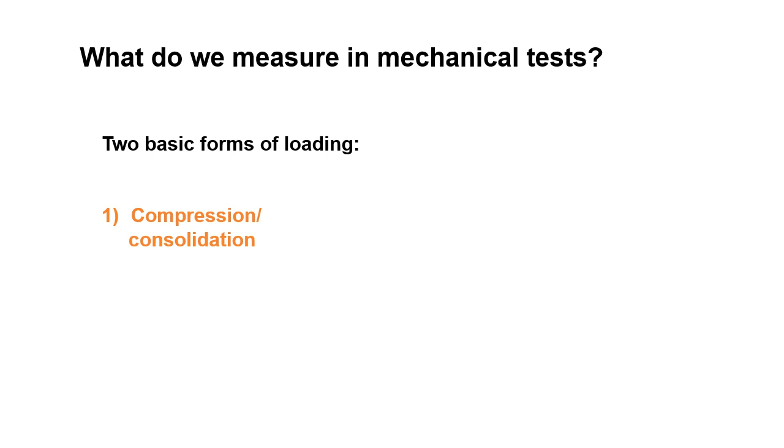So what do we measure in mechanical tests? Well, really, in life, there are two forms of loading. Firstly, compression or consolidation, and we can do that isotropically in the triaxial apparatus, by increasing the cell pressure. That's isotropic loading. Or in the oedometer, what we're applying is one-dimensional or K-naught loading. And the other basic form of loading is shearing.

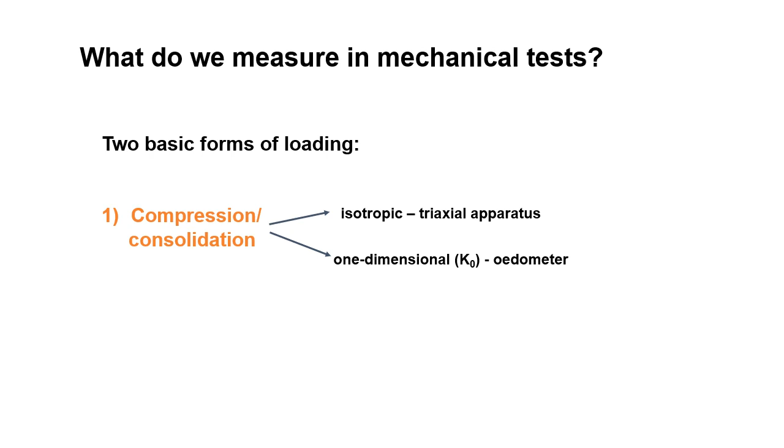In our shearing test, we have some conflicting requirements that are really unique to soil mechanics. No other scientist really has to solve this problem. Firstly, for strength, we need very large strains to reach critical states, and we need the minimum restraint in getting to that large strain, while hopefully the stresses and strains remain uniform. At the other end of the scale, for stiffness, we need to apply and measure tiny stresses and strain changes that, again, nobody else has to worry about. We are unique in soil mechanics.

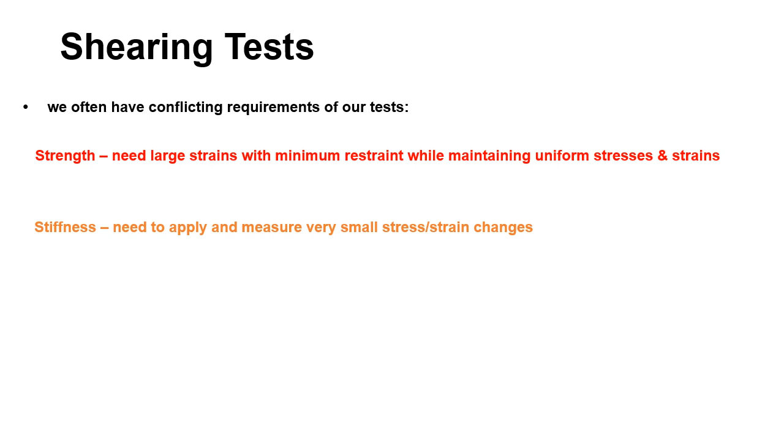The triaxial apparatus is really the only apparatus able to do both of these. Before we get to the triaxial, I'll talk about an apparatus that's more familiar to you because we did it in year one, the direct shear test. So I won't labour this because you're all very familiar with it, I hope.

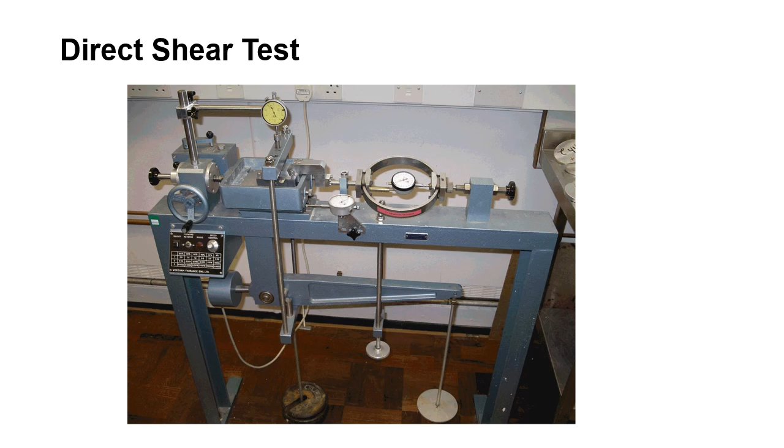That's a schematic diagram of the shear box test, where you've got sort of like a step loading here because of the design, with a normal stress sigma n and a normal shear stress tau. We like to pretend it's doing a perfect sort of shearing like this. Of course it's not, with horizontal and vertical displacements, and h0 is the initial height.

Then we can calculate a shear strain. Remember, it's shear strain in the shear box. A horizontal strain is 0. The horizontal strain would be changing length. Now it's a shear strain, which is delta H divided by the initial height.

And the vertical strain and the volumetric strain are the same. That's because the horizontal strain is 0. And those two, doesn't matter which one it is, epsilon v, v for vertical or v for volumetric, and that's the change of height, delta v, divided by the initial height.

I guess the only real advantage of a shear box is that the mode of shearing is plane strain. That means that, although I can show it on here that it's not changing length, so the horizontal strain is 0 that way, also into the picture, the sample is not changing its width. So it's plane strain. There's no strain into the picture.

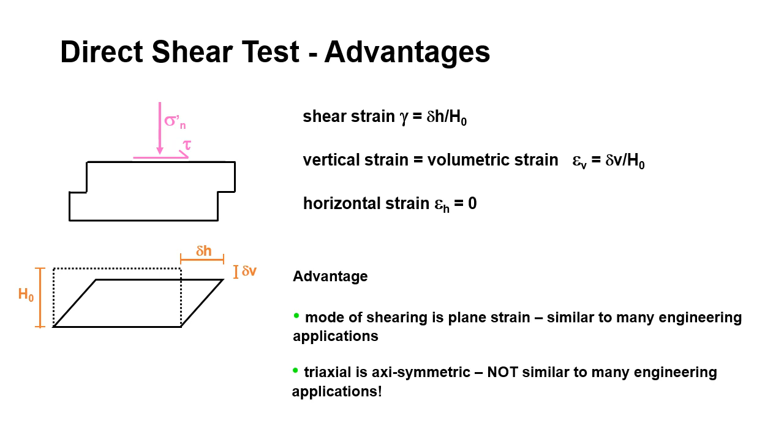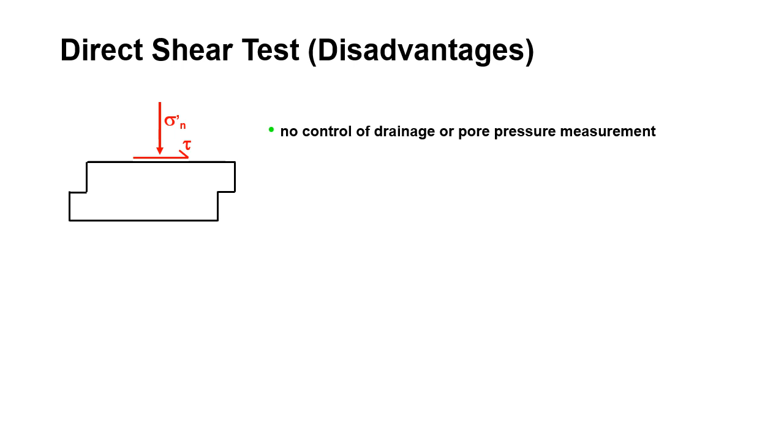Now, there are many disadvantages of our favorite shear box test. Firstly, you can't control the drainage. We did tests on dry samples in year 1, but of course, if you have it saturated, there's no way to switch off a tap and stop the water going in and out. There's no control at all.

Secondly, you may remember from year 1, all of the strains are localized, occurring in the middle of the sample in this sort of lozenge that I've drawn here. And that means that when we calculate gamma and epsilon v, vertical strain or volumetric strain, they're very inaccurate because we're dividing by the whole sample height, whereas actually only this bit's doing something.

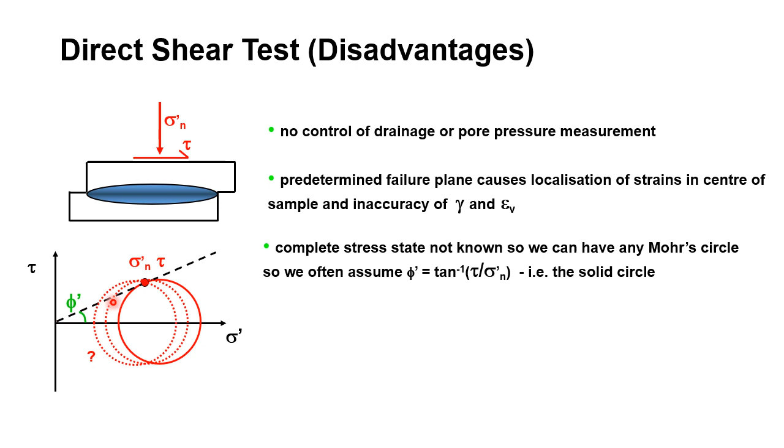And then you may remember that the other big disadvantage is we don't know the stress state. We only know 2 stresses, or one pair of stresses, a normal stress and a shear stress. That's 1 point. Now we can put an infinite number of Mohr circles through 1 point. We assume that the correct solid circle is the red one, giving us that failure envelope phi dash there. There's no reason why that has to be true.

A more sophisticated problem with the shear box is that as you do the shearing, well, you can see that you might start when the shear stress is 0 with that normal stress being a principal stress. But because you're applying a shear stress, the principal stress must be rotating. Now that has an unfortunate effect. It will change the strength of the soil that you measure, especially if it's anisotropic, if it's got different strengths in different directions. So that's a problem.

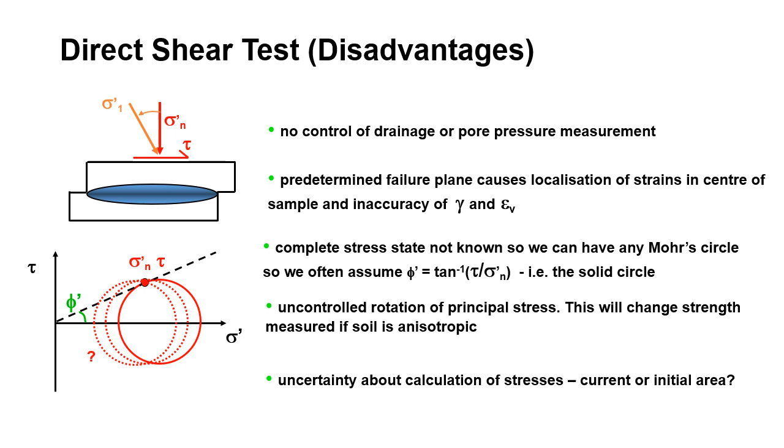And then, of course, you'll remember that there's uncertainty about the calculation of the stresses. Which area do you use? So it does make a difference.

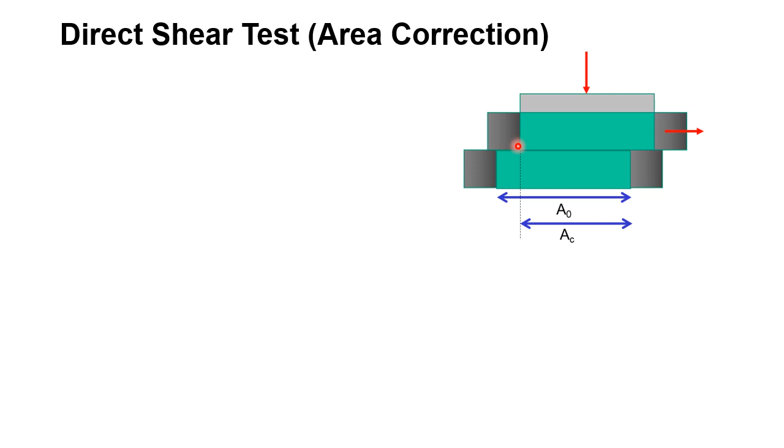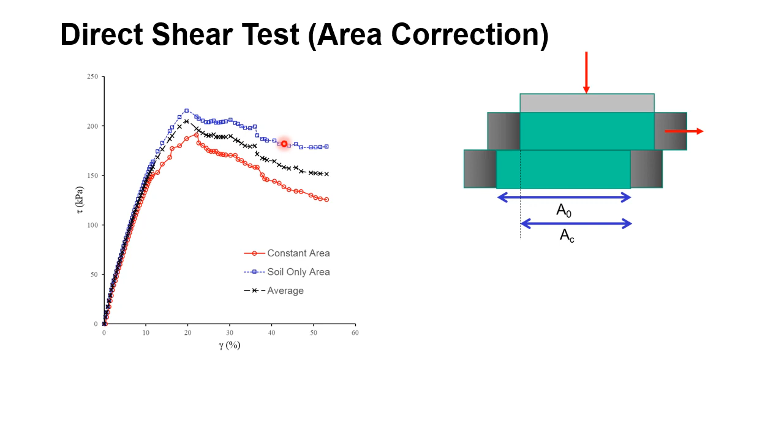This is a schematic of the shear box with that being the initial area, A0. The area of contact with the soil might be this one here, AC, A current. And these are stress strain data from a real test, shear stress versus shear strain: using the constant area, that would be A0, the red one, you get lower strengths. Using the soil only area, that's AC, that gives you higher strength. I don't believe either of them. I tend to use an average. But what you can see is that it makes a huge difference, particularly at the critical state down here. Not so important at the peak.

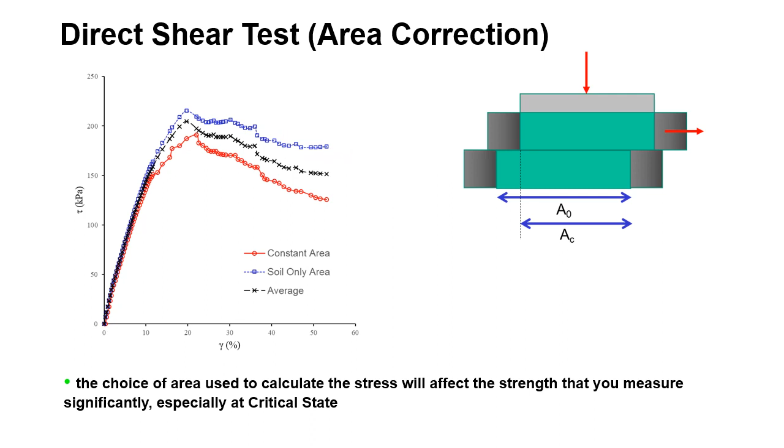The mode of shearing is also very important. We talked about plane strain, that's one mode of shearing. Axisymmetry is another. We can quantify the mode of shearing with what's called B, which is the intermediate principal stress minus the minor principal stress divided by the major principal stress minus the minor.

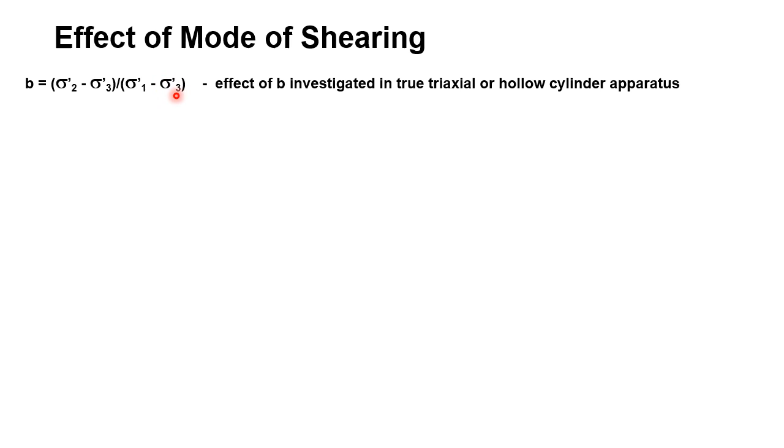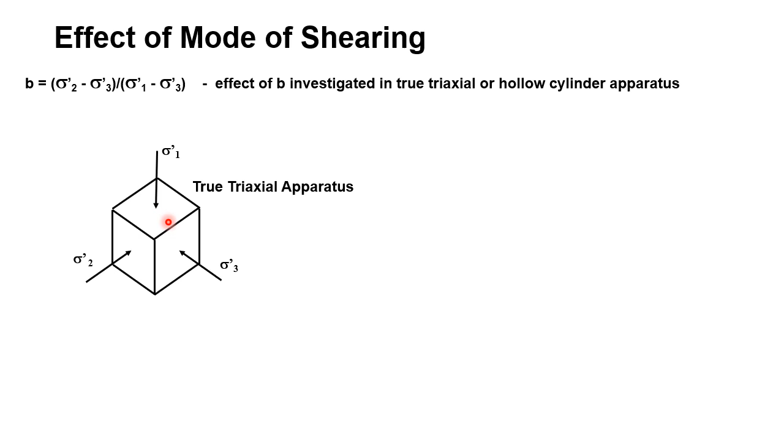Now you really have to investigate this in a hollow cylinder apparatus, which we'll talk about later in the next seminar. You could also use a true triaxial apparatus. Instead of having a cylindrical sample, you have a cubic sample with your major, minor, and intermediate principal stresses.

If you do that, what you get is this: a friction angle plotted against B.

Triaxial compression would be at B as 0. If you think about the definition here, triaxial extension would be at B of 1. Triaxial extension, by the way, is when you decrease sigma 1 while you maintain these two constant. So this stress actually then becomes the minor stress, not the major. That gives you B of 1.

If you look at typical data, like this one here for a typical sand, the friction angle goes up to plane strain and then reduces a bit. So this is what you measure in a triaxial, but a shear box test, plane strain, would give you a higher value.

And that's good, really. Having a higher phi dash in plane strain is good, because although we can get a phi dash that's very accurate in the triaxial, unlike the shear box, it will be conservative. In fact, in design, what you probably should do is take your triaxial compression value and add a few degrees. Better that than relying on a shear box, which is just rubbish.

And of course, as I said before, almost all engineering design is plane strain here, not triaxial compression, which is what we do.

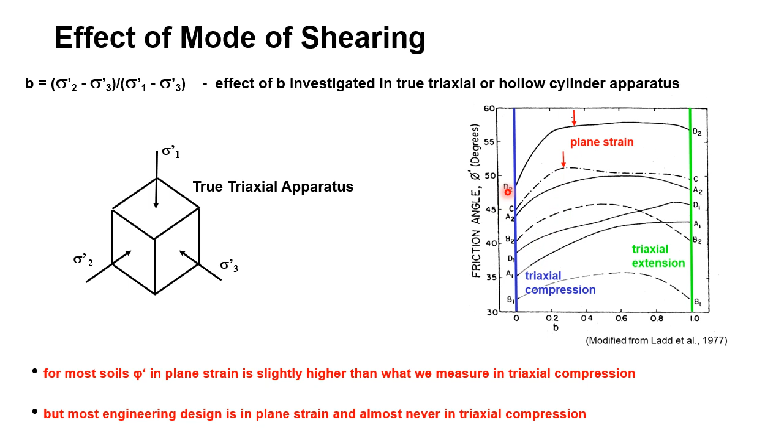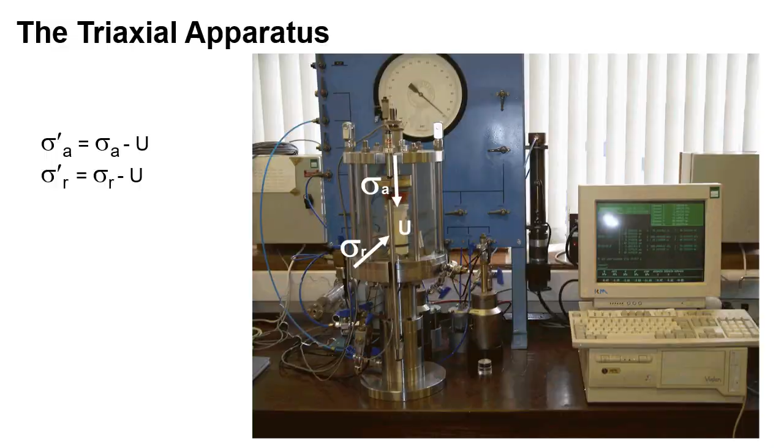So here's a schematic diagram of a triaxial sample with axial stress, and the two radial stresses, of course, the same. The advantages of a triaxial is that we can control the drainage. We can switch off a tap to make it undrained, not like a shear box.

You know the complete stress state. We can calculate sigma R dash and sigma A dash from the pore pressures and total stresses. And therefore, we know where is the Mohr circle, and we know where is this friction angle.

Disadvantage, as I've said a couple of times, is that it's axisymmetric, and soil parameters depend on the mode of loading. It's not the right one. We would prefer plane strain.

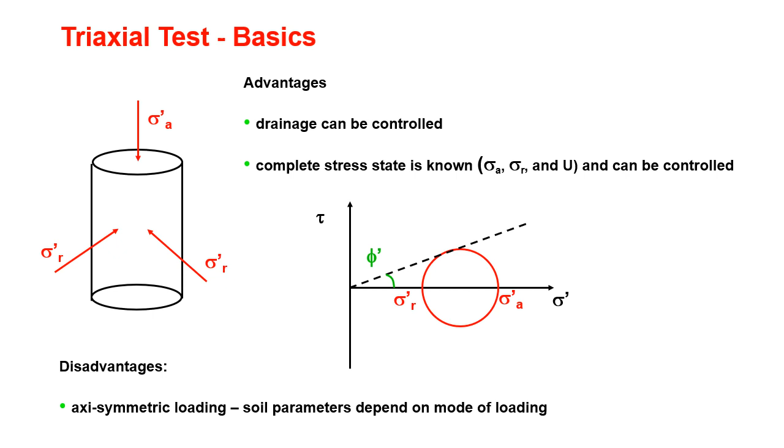This is really revision from year one, so we'll speed through this very, very quickly. Remember that your shear stresses don't mind whether they're effective or total, they're the same thing. Effective stresses are total minus pore pressure.

Remember that on your triaxial, there is no shear stress on this boundary. Why? Because you're applying the pressure with water, and water doesn't transmit shear stress. So if there's no shear stress on that boundary, there's no shear stress on that boundary. So sigma A and sigma R are principal stresses. This should all be revision.

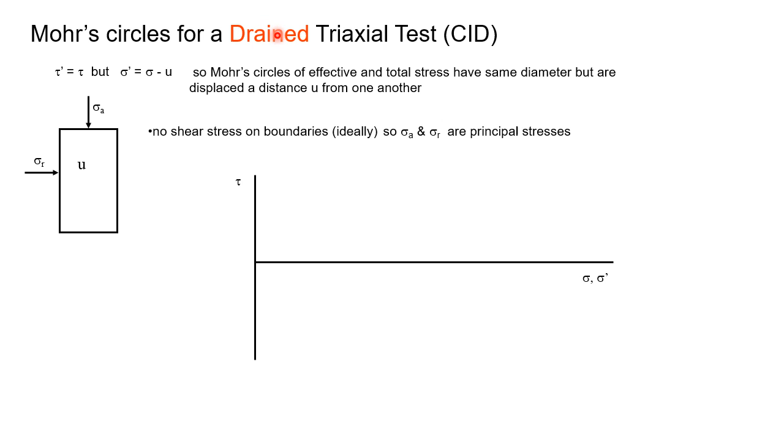For drained tests, we're talking about drained tests here, your Mohr circles will look like this: total stresses in red, effective stresses in blue. They're exactly the same Mohr circles, they're just offset by the pore pressure.

It doesn't matter where I measure the pore pressure, I could go from there to there. Any two similar points will give me the same value because the Mohr circles are identical, they're just offset. So that point and that point will have the same pore pressure.

It's constant. It's the final Mohr circle at failure in effective stresses that defines failure. The total stresses are of no interest.

And then if you remember your pole, well, your pole of your Mohr circle is there at sigma r dash. So the plane of failure will be that one, which translates to the same angle in reality in the sample. And that will be the plane on which you might get a well-defined failure plane forming. There's another plane of failure going to the failure envelope on this side, which is that one.

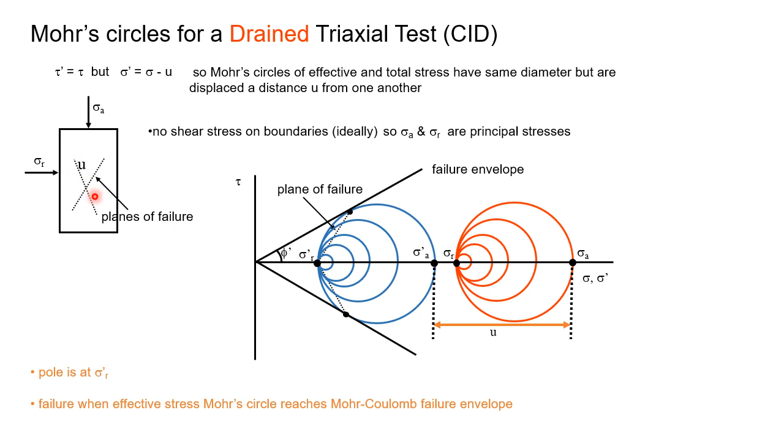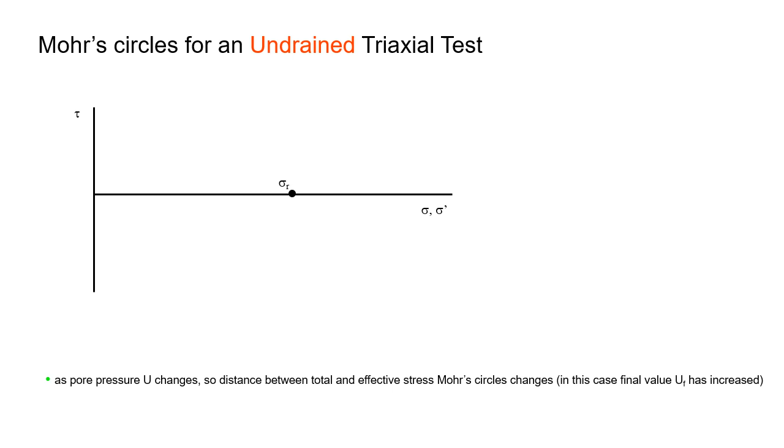Now for undrained testing, again, hopefully it's revision so we can go through it quite quickly. The total stresses just look the same. The Mohr circle gets bigger as sigma A increases.

The effective stresses, remember, they start off as a point. Initially, the axial and radial stresses are the same, and the Mohr circles increase in size. But here there's a catch: the pore pressure is changing. So the final pore pressure, UF, is different to U0. So the Mohr circles of effective stress are migrating.

In this case, they're migrating towards the left. So sigma r dash is moving towards the left, and that's because the pore pressure has increased. You could have the other case where the pore pressures decrease and the Mohr circles would go off this way, getting bigger but going towards the right. The total stresses will always stay in the same place.

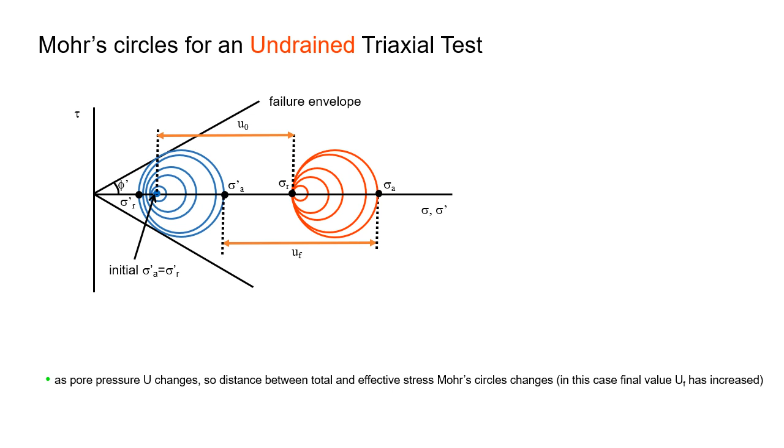Of course, if you want to represent the whole test, a Mohr circle is a bit useless because there are an infinite number of Mohr circles between the start of the test and the end of the test. So we do that with stress paths.

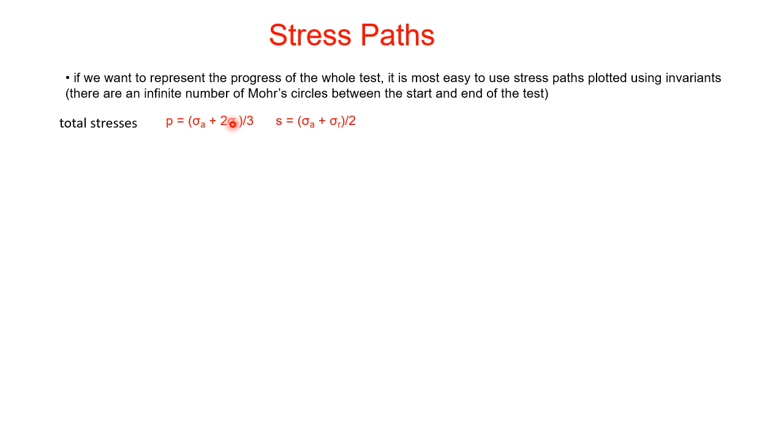I hope you remember the definitions of P, which is the average stress, the mean normal total stress. Total, no dashes: axial stress, 2 times the radial because there are 2 horizontal directions, all divided by 3. Engineers in industry love S, which is just axial plus radial over 2. They like that because that's the middle of the Mohr circle.

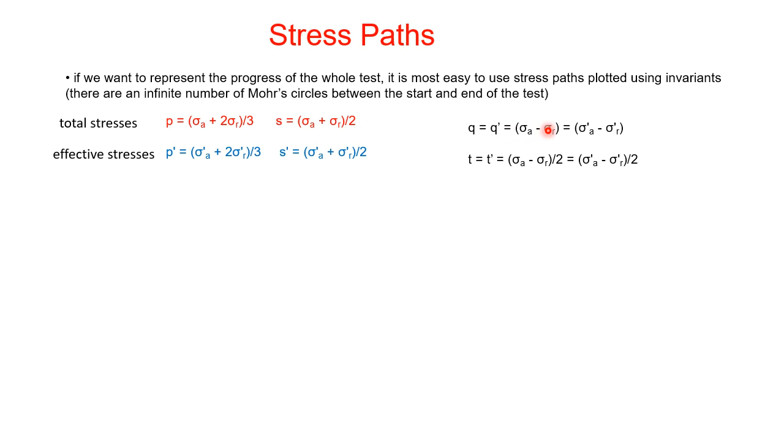Effective stresses, they're just dashes in here. So effective stresses, effective axial, effective radial, give you P dash, and same with S dash. In terms of Q, Q and Q dash are of course the same, and that's simply the deviator stress. The axial minus the radial stress doesn't matter whether it's total or effective, it's the same. And the same is true of T or T dash. It's half of Q, the radius of the Mohr circle, whereas Q is the diameter of the Mohr circle.

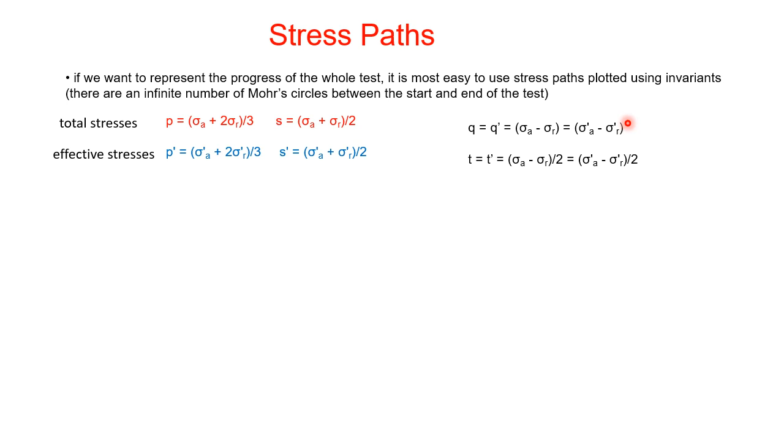So, for a standard drained triaxial test, engineers love this because if they plot T against S or S dash, the total stress paths and the effective stress paths are parallel. They have a gradient of 1 and they're just offset by the pore pressure. It's drained, so the pore pressure is constant, so they remain parallel.

It's more complicated in Q and P. The total and effective stress paths are again parallel, separated by the pore pressure U, which remains the same, but the gradient is 3. You have to look at these equations for P and Q to understand why the gradient is 3. Remember, sigma A is increasing, whereas sigma R is constant, so you can see that's where the gradient of 3 comes from.

So, T and S are loved by practicing engineers. They're easy, they represent the top of the Mohr circle, the gradient is 1, but they're not right. They're not invariants because in T and S you're forgetting one of the stresses, one of the horizontal or radial stresses has gone. They are not correct.

Of course, if you did a well-designed test, you can see here with a normal triaxial test there's a problem. As you do the test, you're increasing the deviator stress, which is essentially increasing the shear stresses. But also you're increasing P dash, the normal stresses, which is a bit of a rubbish test to do. Any good physicist wouldn't do that.

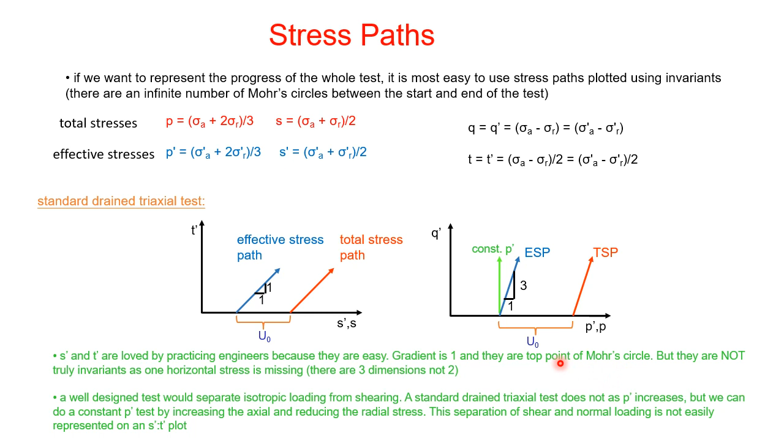He or she would have a test where you increased only the shear stresses and you'd follow a vertical path, and P dash would be constant. Now you can do that in a triaxial apparatus. If you look at the equation here, all you would have to do is increase the axial stress while you decrease the radial stress at half the rate. You can do it - nobody does it, which is a great shame. It's a more fundamental type of thing to do, separating the shear stresses and the normal stresses.

You'll remember from year one that drained stress paths may go directly to a critical state on loose samples or at high stresses, and at dense samples or lower stresses you may go up to a peak and then back to the critical state.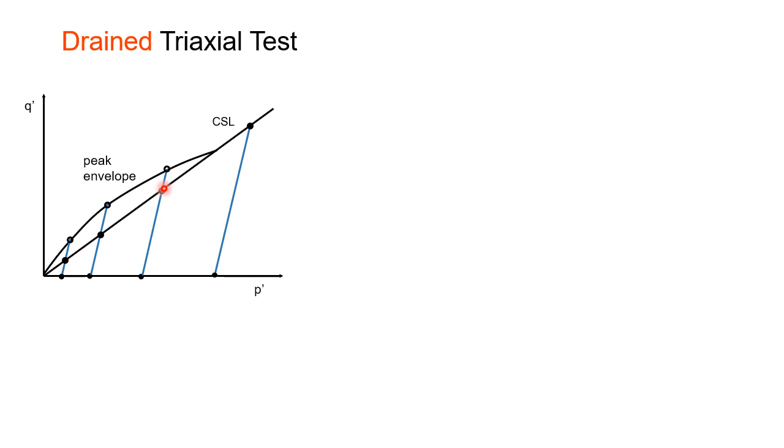Of course, the usual test is this one here, at a gradient of 3 with the total radial stress constant and pore pressure constant - that's the gradient of 3. But as I said, with a computer-controlled apparatus, you can do anything. A particularly useful one is that constant P' test, which is pure shearing, no change of the mean normal stress. But you can do anything you want.

You can take these stress paths in any direction you want. In red, total stresses, in blue, effective stresses. And the offset is simply the pore pressure, and the offset, the pore pressure, is constant for each pair.

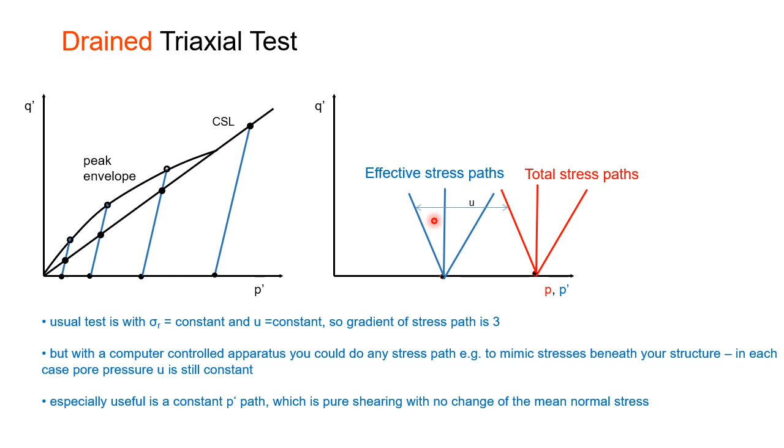Unfortunately, we don't typically take advantage of the capability of the apparatus to do that type of thing. We could, for example, mimic the stress changes that we're expecting beneath our structure, but we tend not to do it.

In undrained loading, remember that the soil is going to decide whether the stress path goes left or right. Over consolidated soils go that way, normally consolidated soils go that way. It's the soil that's deciding, not you.

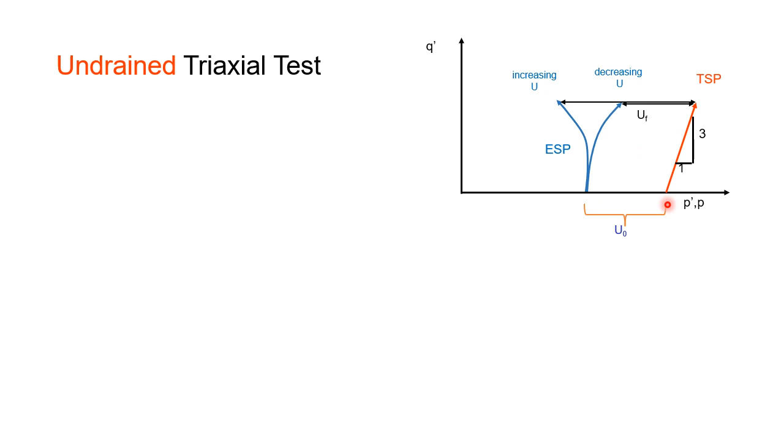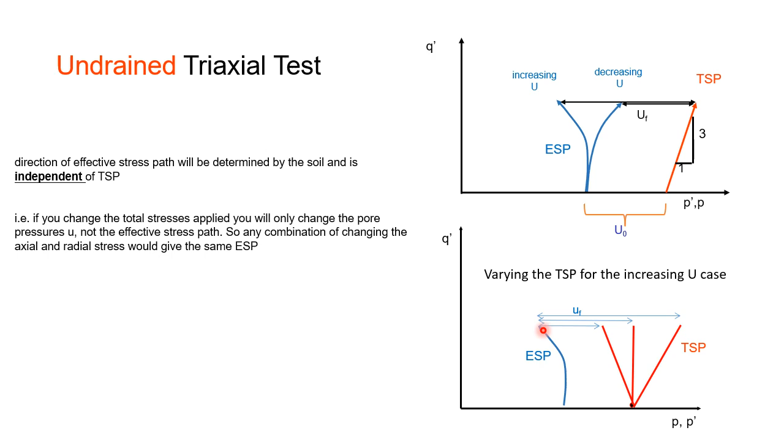So if you change the total stress path direction, let's say for this example with a normally consolidated clay with a stress path going left. If you change the total stress path by applying different stresses in your triaxial and it's undrained, it won't make any difference. The effective stress path will just be the same. All that will happen is you'll measure different pore pressures because you've chosen a different total stress path. The soil determines the effective stress path, not you.

So here's the design of the triaxial apparatus. Firstly, remember that the radial stress is applied by water pressure in this chamber. That means the sample has to be contained within a latex membrane to stop that water pressure going into the sample. You can see the latex membrane here. That means the sample will drain if it changes volume through this tube here, this drainage line, and we can simply switch off a tap there, and then we can control if it is drained or undrained.

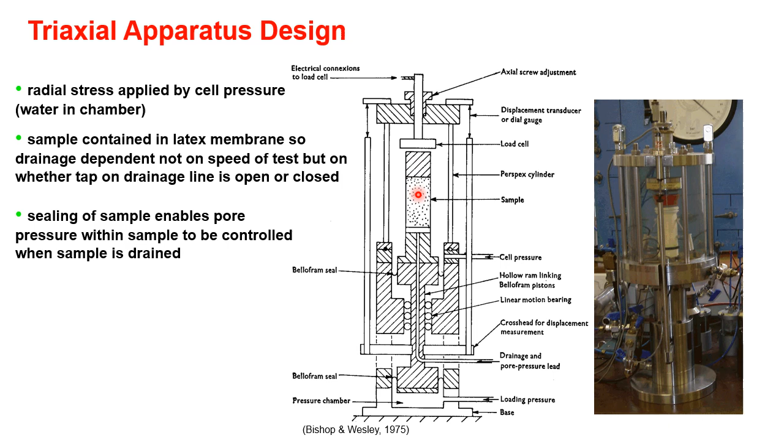Because the sample's sealed, if we leave that tap open and it's drained, we can also change the pressure inside the sample. It's our choice what it is.

This apparatus is a more sophisticated one, not typical of industry, but more typical in universities, which is a hydraulic one, and it's got a piston running up through here. The piston loads the sample from underneath, pushing it against a load cell, and you push the piston up with pressure in a chamber here. It's hydraulic.

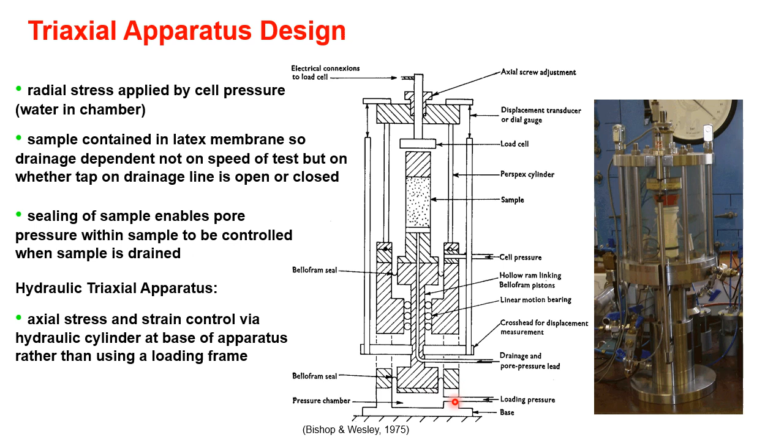More typical is the type of thing that we would have talked about in year one, which is using a loading frame. And typically, one you might see in industry, the loading frame pushes a ram down to the top of the cell, pushing the sample from above. That's rather less sophisticated, but unfortunately, that's what industry tends to use.

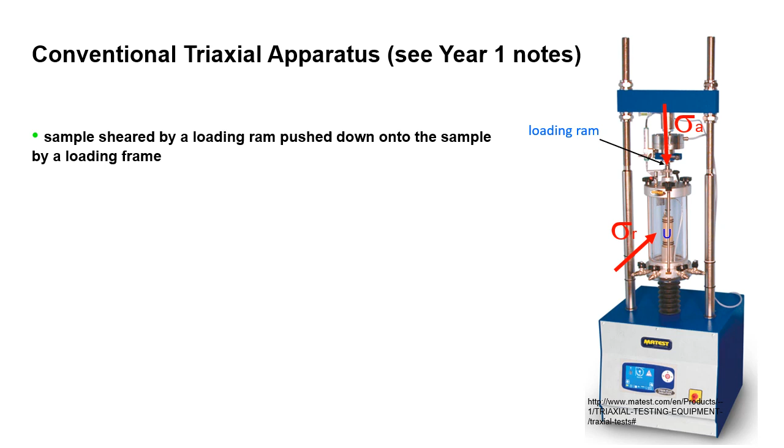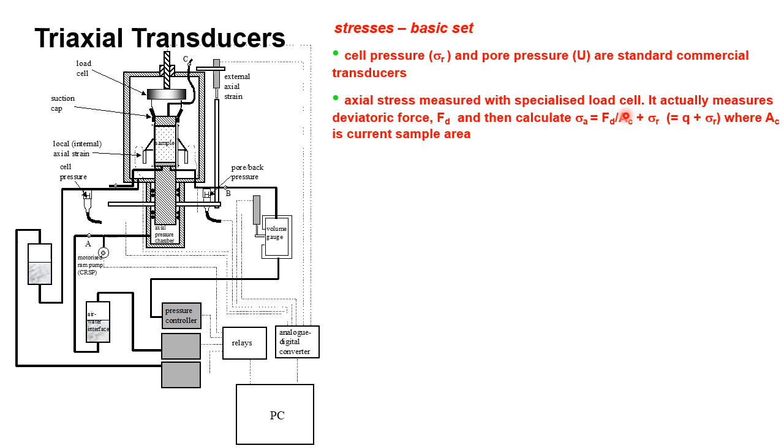Or for the axial stress, you have to take the deviatoric stress plus the radial stress, the cell pressure. And the area you have to use in the calculation of the deviator stress is the current area of the sample, because the sample will be changing dimensions during the test.

For the strains, for the axial strain, we have an LVDT here, which is measuring the axial displacement. As this piston moves up, it's moving this system up, pushing this displacement transducer up. Of course, we divide by the initial height of the sample to get the axial strain.

The volume change of the sample is measured by measuring the water coming out of the sample and going into a volume gauge here, which measures the water coming out, or indeed going into the sample. Of course, you have to divide the volume change in cc's by the initial volume of the sample to get the volumetric strain, epsilon v.

Typical apparatus have no measurement of the radial strain. Now that would be good, but it's not typical. So what we have to do to calculate shear strain, which would normally be 2/3 axial minus radial strain, we don't measure that. So we have to take axial strain minus volumetric strain over 3. You work out the mathematics, it's the same thing.

And also, because there is no radial strain, which would give us the current area very nicely, we have to calculate the current area for this calculation from the axial and volumetric strains, which we'll see in a minute. There are more advanced transducers, which we'll talk about in the next bit of lecture.

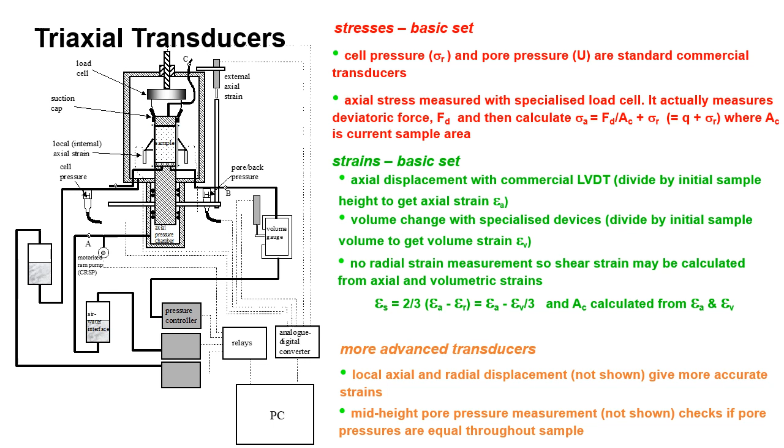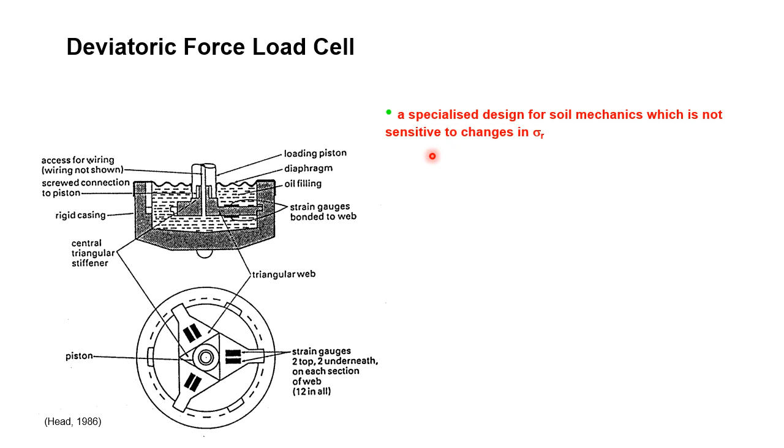This is the load cell that measures the deviatoric force, the change in force from the initial isotropic state. There's very specialized transducers coming from just soil mechanics, so they're expensive and unreliable. It's a load cell which is full of oil pressure, and I won't go into the design, but it makes them insensitive to changes in pressure. So if the cell pressure changes, the load cell reading doesn't change. It only changes when it presses down on the sample.

I mentioned area corrections. Those are very important in soil mechanics and triaxial tests. So this is deviator stress against axial strain. This is data for London clay. And you can see the green line is the sort of raw data with no area correction, or just assuming that the area is constant.

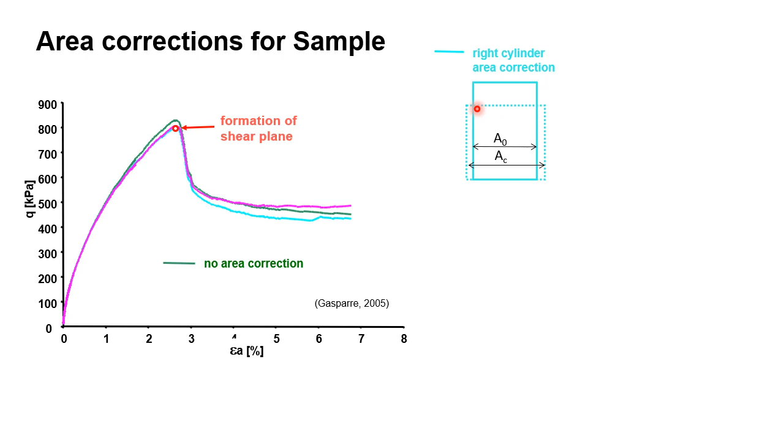The traditional area correction is what's called a right cylinder. You assume that the sample area just remains a cylinder, but a short fat cylinder instead of a tall thin cylinder. And you can calculate the new area like this: A naught, the initial area, times 1 minus epsilon v, volumetric strain, divided by 1 minus epsilon a, axial strain.

Of course, many samples, particularly one like this, which strain softens rapidly, tend to develop a shear plane. Then I have to tell you that the calculation of the area to use to calculate these stresses gets more complicated, and I won't give you the equation. It's really too complicated for you. It's nasty.

But then, of course, some samples will fail in a very complicated way like this, and then you can do nothing about it. There's no formula for that one. And the difference is significant, particularly at the larger strains down here at the critical state, which is what we saw in a shear box.

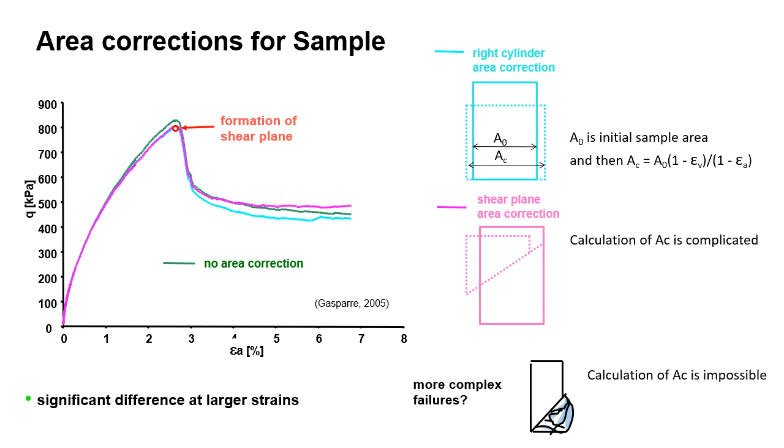We can measure the volume change on the sample by using a volume gauge device. This is the Imperial College type. The water comes out of the sample through a drainage line, pushes into a chamber, pushing a piston down, and that's registered on this displacement transducer. We can use the same device to apply pressure to the pore pressure by putting some pressure under here, transmitted through the piston and into the sample.

The other way to get the volumetric strain is to measure the radial strain, but it's rarely done, in which case you would have the axial strain plus 2 times the radial strain as the volumetric strain.

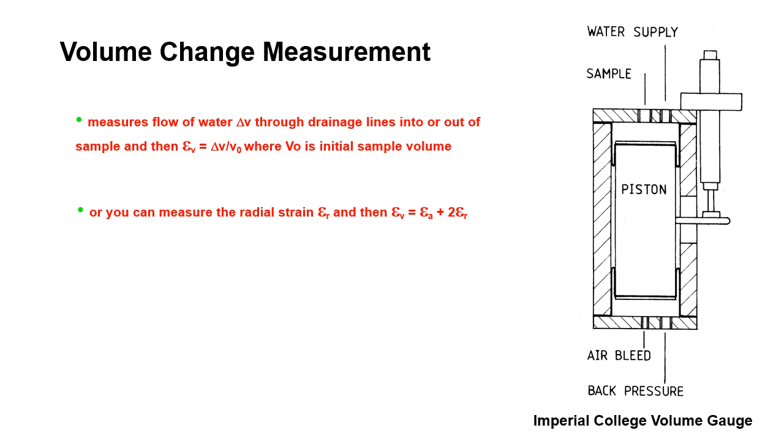Measuring stresses and strains is common these days. Nobody does it manually anymore, even in industry. But what is less common is using control of tests by computer. Remember, I said the computer is a very cheap old thing, one that's come out of a rubbish skip. What is sophisticated are the control algorithms. They're very sophisticated, but we don't need fast computers because the tests are very slow. The test speed is controlled by the soil response, which is slow.

So here we have our triaxial. The transducers send voltage out to the data logger. That sends a signal out to the computer. And that converts it into kilopascals. So this will be sending millivolts or something to the computer. The computer converts millivolts into kilopascals or millimeters and strains and stresses and things. That then decides how the test is running and what changes need to be made. It will send a command to a controller, and the controller will change things in the triaxial.

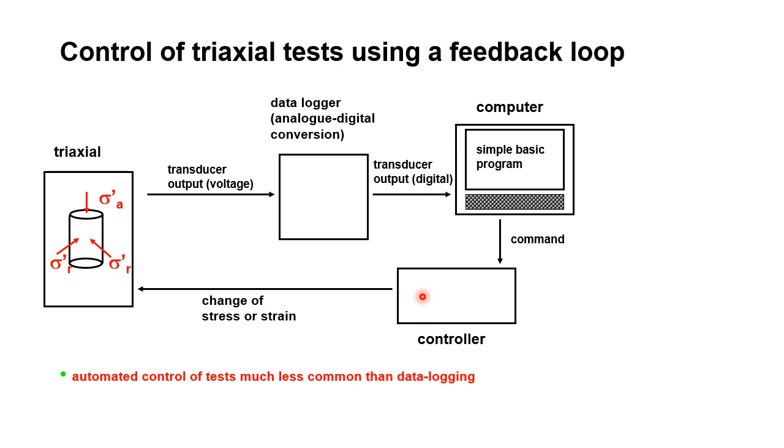So you know about the transducers, and I'm sure you've seen data loggers. The whole thing is called a feedback loop. What you don't know about are the controllers. So let's have a quick look at those. A very simple system like the Imperial College system is air-driven. So you need compressors to supply the air.

There are 3 air pressure controllers, one each for the axial stress, the radial stress, and the pore pressure. You need air-water interfaces because the chamber has water pressure in here, water pressure in here, and water pressure inside the sample. So you need air-water interfaces.

Now, I already said that for the volume gauge, that provides an air-water interface. So air is going in the bottom, water pressure is coming out of the top and going into the sample. But the other two, you need an air-water interface as well. So air pressure is coming in here, water pressure is coming out and going into the base of the sample. Likewise for the cell pressure.

If we were to do a test where we just increased the axial pressure in this chamber and the soil were strain softening like the London clay we just saw, when we reached the peak, it would suddenly fail and the whole thing would move up suddenly as the sample collapsed. So we don't do that.

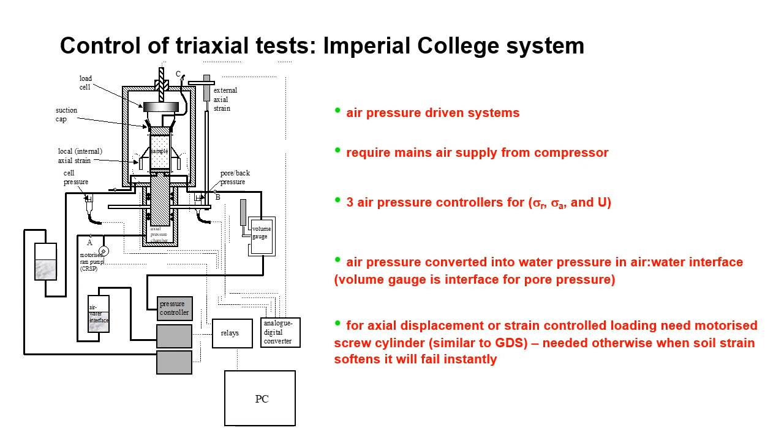What we do is we push water into this chamber at a controlled rate in terms of cc's per hour, and we do that with this device. It's a screw cylinder, a motorized screw cylinder, similar to the one commercially made by a company called GDS, which is this one. You have a motor and a gearbox driving a ball screw with a piston pushing water into the apparatus. Now that's happening at a controlled rate of cc's per hour, not a controlled pressure.

Now the GDS system is a very clever one. It can be used to control rates of displacement, but it also can be used to control the pressure. The computer can move the motor up and down to give you a particular pressure in this cylinder.

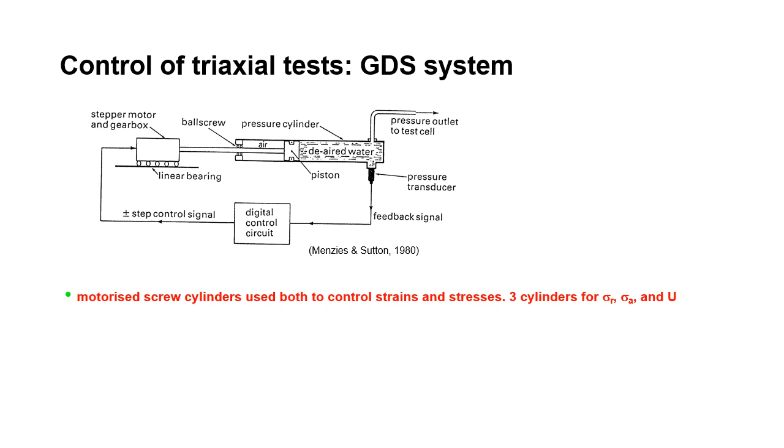Finally, for this part of the lecture, I'll talk about philosophy of testing. There is an awful lot that can go wrong with conducting and interpreting tests. We must never conduct and interpret tests unless we have a chosen and appropriate theoretical framework. We must know that theoretical framework, the one we want to use, before we do the test.

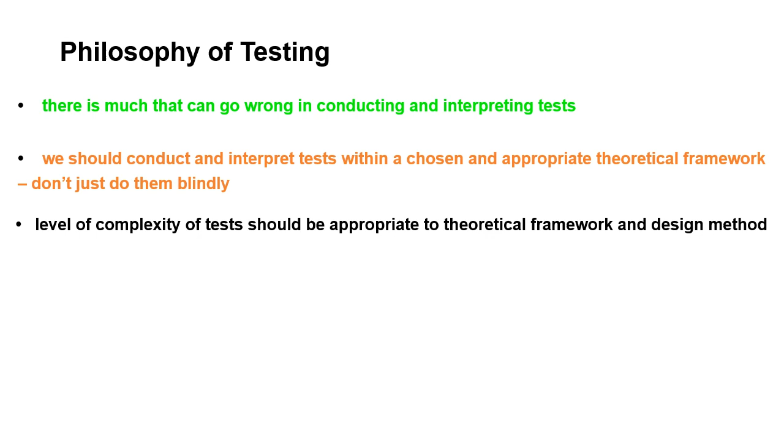That's a problem because, of course, these days people do the lab testing long before they've decided what exactly they're designing, which is a major problem. The level of complexity of the tests must be appropriate to the theoretical framework and the design method, i.e., what we're designing. There's no point in throwing money away on really complicated tests for something that's very simple and not an important structure.

You should never use a shopping list of tests. There's a temptation for young engineers to simply see what was done on the last project and have the same tests. Why not? Well, no, that's not right. You have to decide what quality of data you really need and what you need it for.

Although I said you should be careful about doing appropriate tests to your design, the level of complexity should be appropriate. Large numbers of poor tests can be very detrimental when choosing a design value, and I'm going to show you a shocking example, which is from my own work.

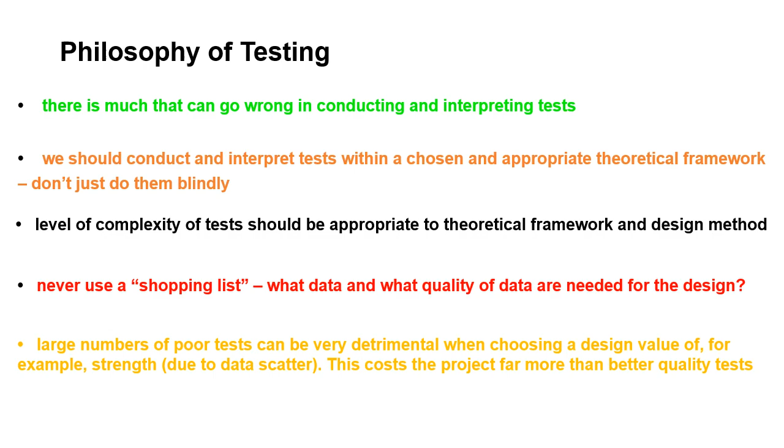So this was my first project. I was barely 21 years old, so that's my only defense for such terrible design. I was designing these piles in a North Sea gas platform. These piles are waiting to be driven through the legs of the structures here. Anyway, this is a design profile for undrained shear strength in the clay.

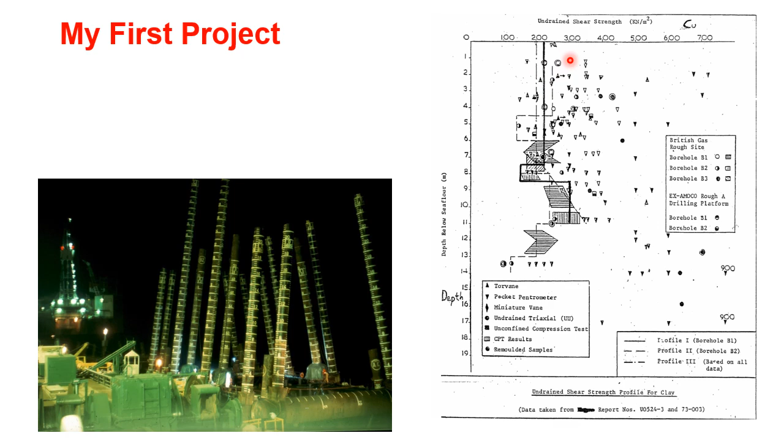Undrained shear strength was then called CU, now called SU. This is the depth. The problem is I plotted lots of data, some good quality like the undrained triaxials and some terrible quality like pocket penetrometer. Because I've not discriminated between the test data, it's all over the place. So my design profiles are these lines here, which are very conservative, simply because I'm plotting too much poor quality data. The reality would be somewhere up here.

So large numbers of poor quality tests, cheap tests, meant that the design strength for the undrained shear strength was far too conservative. Must have cost hundreds of thousands, maybe millions of pounds, that mistake.

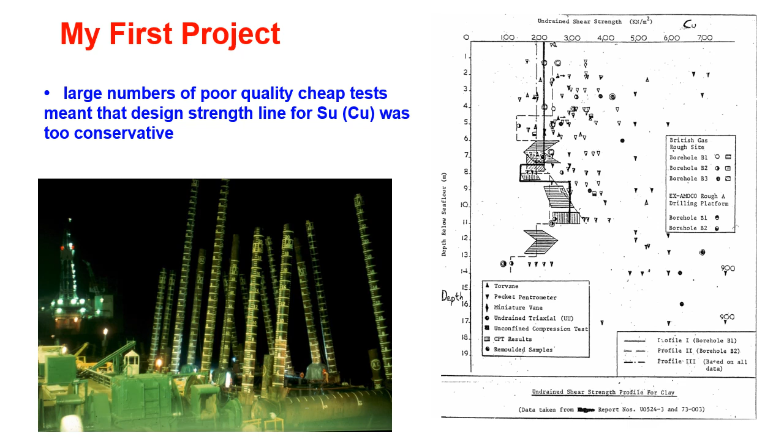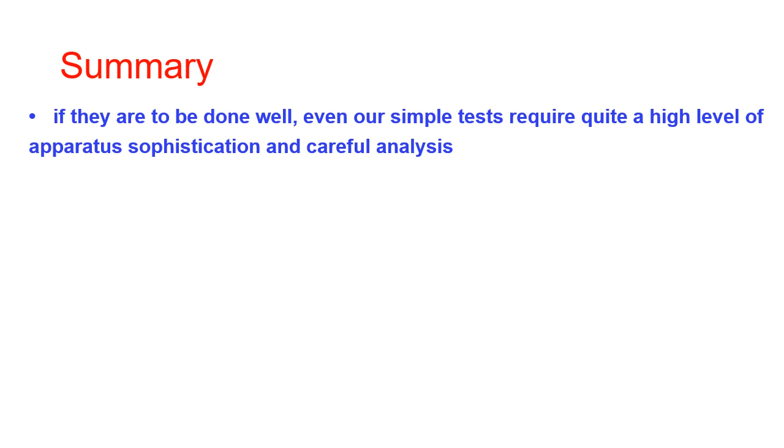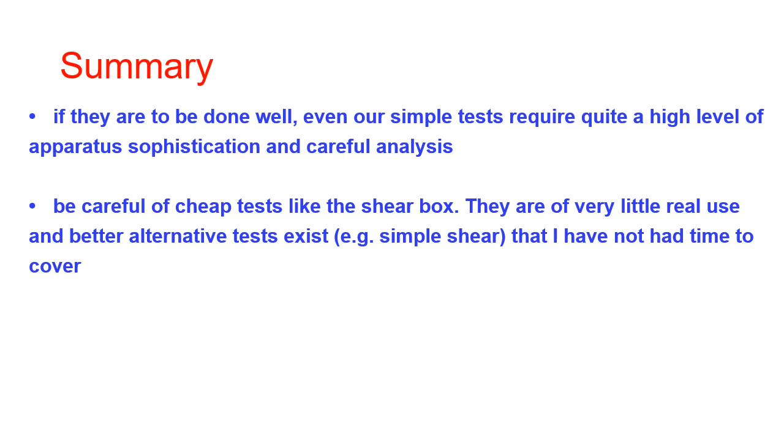So in summary, if they are to be well done, even our simple tests require quite a high level of apparatus sophistication and careful analysis. Be careful of cheap tests like a shear box test. They are of very little use, and better alternative tests exist, for example a simple shear test, which I've not had time to cover.

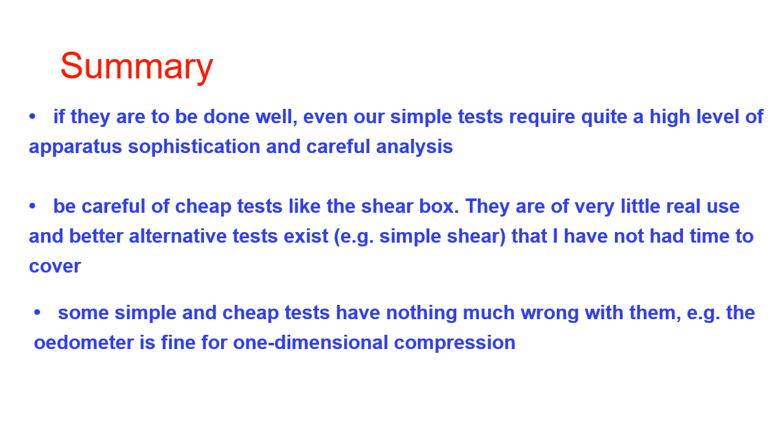Some simple and cheap tests have nothing much wrong with them. The oedometer test is a fine test for one-dimensional compression, nothing wrong with that at all.